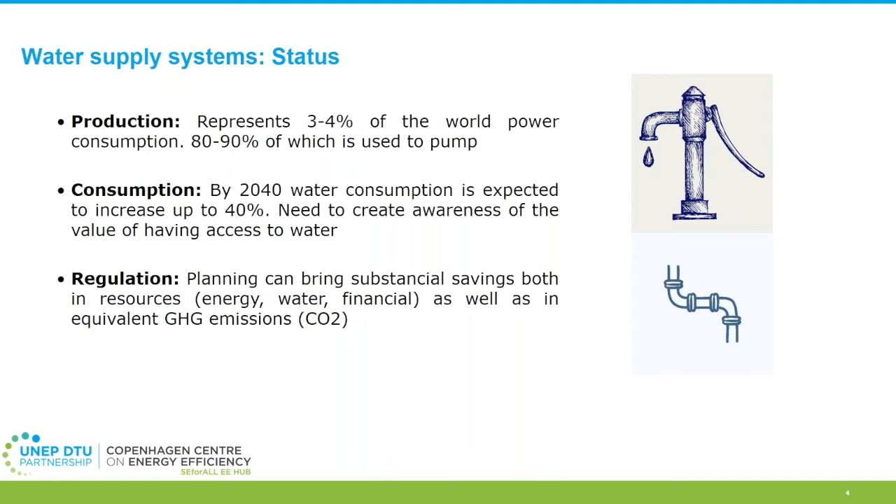Moving a bit into the specifics of the different stages and cycles of the water system. The water supply systems or distribution systems are the intermediate stage of the water cycle, and normally the one that consumes the most: on average 50 to 60% of the energy consumed in the whole cycle is used at the distribution system. Any inefficiency at this stage, of course, will have a larger impact in the overall cycle, as the other stages are tied to the consumer's demand, which is located in the supply stage.

But why is this so important? Basically, energy is the largest controllable expenditure in the water utilities. A high electricity demand can lead to unsustainable cost of operation, affecting directly either the public finance, budgets, or tariffs for final users. But best practices have demonstrated that specific individual energy efficiency actions and water efficiency actions can bring savings of up to 40% of energy and payback lower than 5 years.

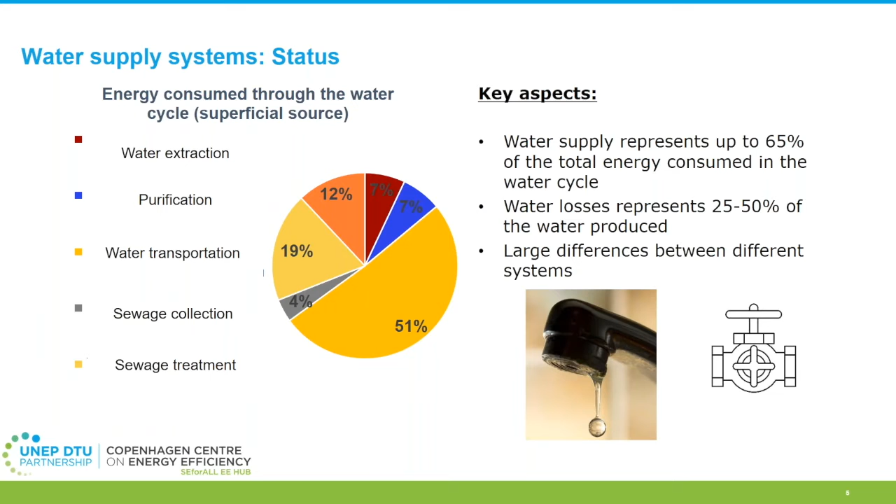So let's move into more specific energy efficiency opportunities and why actually we shouldn't look into individual opportunities, but more into a holistic approach on how we can bring together a joint solution for several aspects of the water supply systems.

So first of all, how can we measure the potential impact of specific energy efficiency actions? Indicators such as the energy index help us understand the existing relation between the production of water, or water pumped, and the energy consumed to pump this water, providing us with a baseline for comparison of more efficient solutions, or to understand if the existing system is already an efficient or a good one.

The potential benefits of specific energy efficiency actions can then be benchmarked against the current situation, analyzing both energy efficiency increase, reduction of energy consumption, and of course, what matters more, financial savings or equivalent greenhouse gas emissions or others. Only one thing about this indicator is that it needs to be normalized, which we will see later.

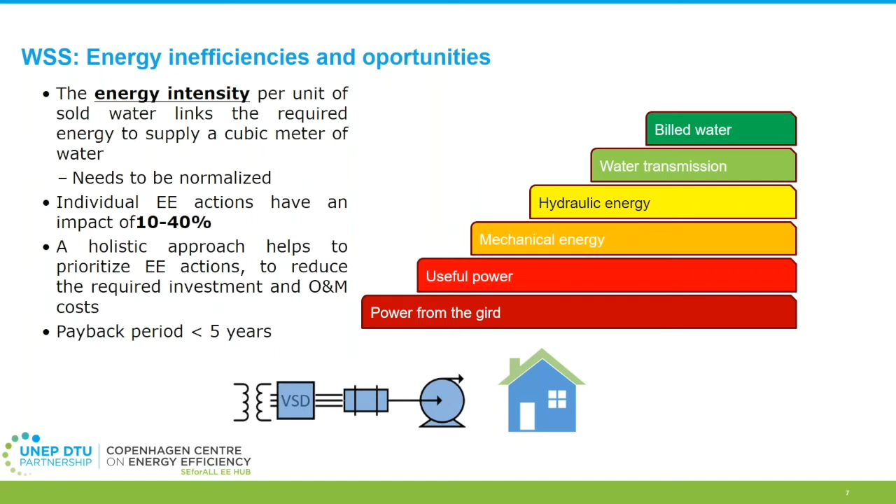Normally, the largest inefficiencies are easy to spot or are directly found in pumps, mainly working out of their design points or because of a lack of maintenance and being aged, so efficiency decreases quite a lot. But also we can find it in electric motors with the lack of variable speed drives. We can also find penalties from the power supplier due to low power factors, or lower efficiencies on transformers.

Normally, the issue is also that the fallacy that energy efficient components are too expensive is quite spread. But as a matter of fact, the purchasing price of any of these components doesn't represent more than 5 to 10% of the cost of the whole component during its operation over its lifetime, the rest being electricity prices and maintenance costs. So even though these more efficient components might cost up to 25 to 50% more as initial investment, the savings they would bring would impact much more the final finance of the system.

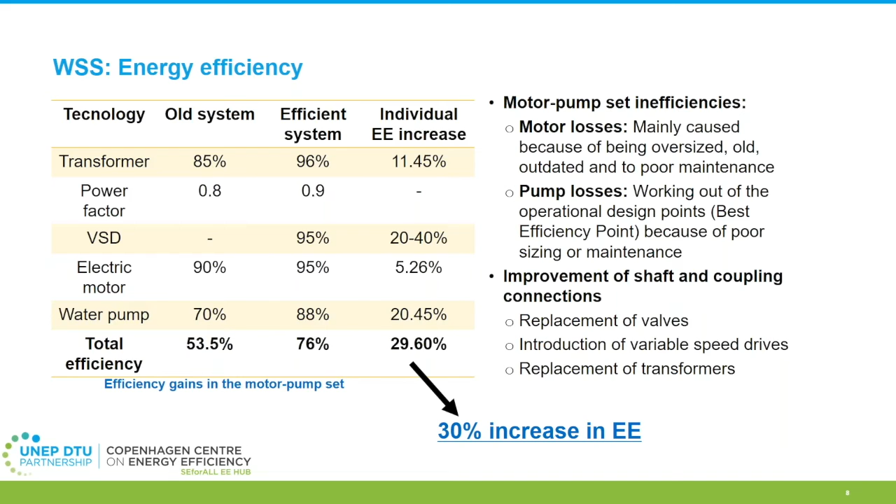As we were talking before, how can we compare existing situations with potential improvements through the use of energy indicators? These indicators are not just about a number, or the energy consumed divided by the water produced. We need to use some kind of scales that help us classify the obtained results as either good or bad. And then from that result, compare or benchmark with potential solutions or potential projects that we may have to set.

So basically, if national regulation is not yet available, we can use international best practices. For the normalized index, which basically brings the energy index to a common scale of pumping over 100 meters, we can either use the International Water Association indicator, Ph5, or the Portuguese standard, which follows the same as the IWA, from AA13AB. Both indicators are basically an energy index that joins efficiency for the motor and the pump, so the motor pump set. And these indicators can be used to classify these sets as a whole by either good, average, or bad performance, as in a traffic light.

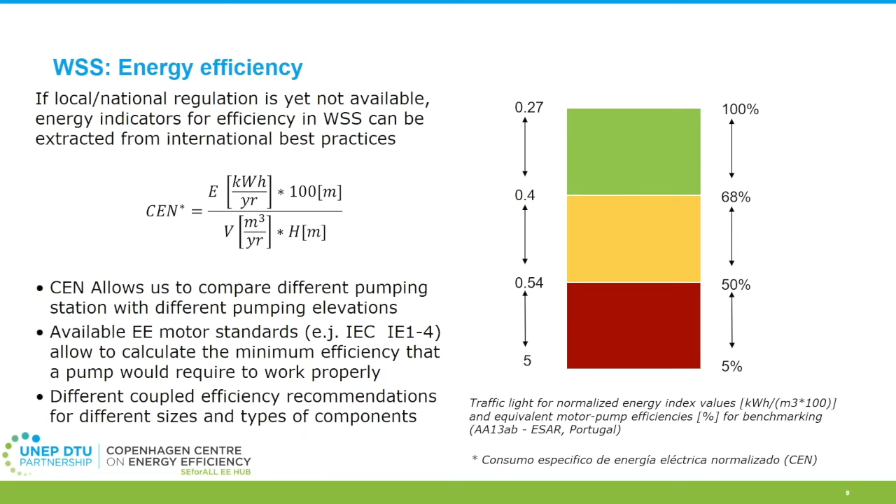Also, what about the total cost and investment return? As we were talking before, efficient or more efficient devices are more expensive, no? How can we define what's a good or a bad investment? The cost, of course, is 100% dependent on the local market, unless we aim to purchase something that is more efficient and is not available in the market. So we would have to go to a foreign country or some bilateral agreements that may exist.

A good way to select among different project options and to present to financial institutions or banks is to set up a limit payback period. For example, defining a limit of either 3 to 5 years to present to them, or 6 years in the case of transformers.

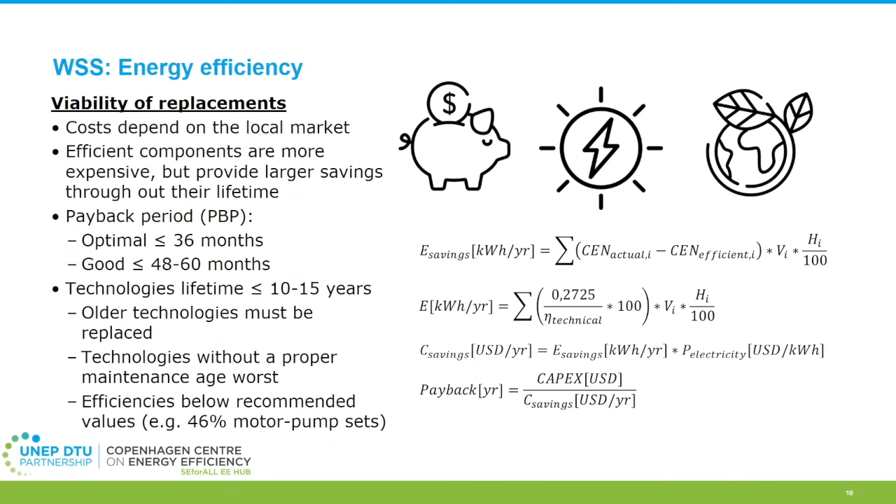But other factors to take into account are not only the payback period, but it could be the age of the components, being far beyond the limit of their lifetime, or also very low efficiencies that, even though the savings are lower, really constrain the grid, as could be a motor pump set efficiency lower than 46%.

A few examples now. As I was saying before, energy efficiency in water supply systems is not only about one simple component or even one utility at a time. It might happen that we identify several motor pump sets or several components throughout a region or a country that have the potential to be replaced. So we can make a joint effort to purchase more than one at a time and gain negotiating power.

One really good example is the energy efficiency increase in water supply systems in Guyana. The national water utility, together with the Inter-American Development Bank, studied the existing efficiency in several pumping stations throughout the country. And they identified where the energy efficiency opportunities were higher to alleviate both the utility's finances and the pressure on the national grid.

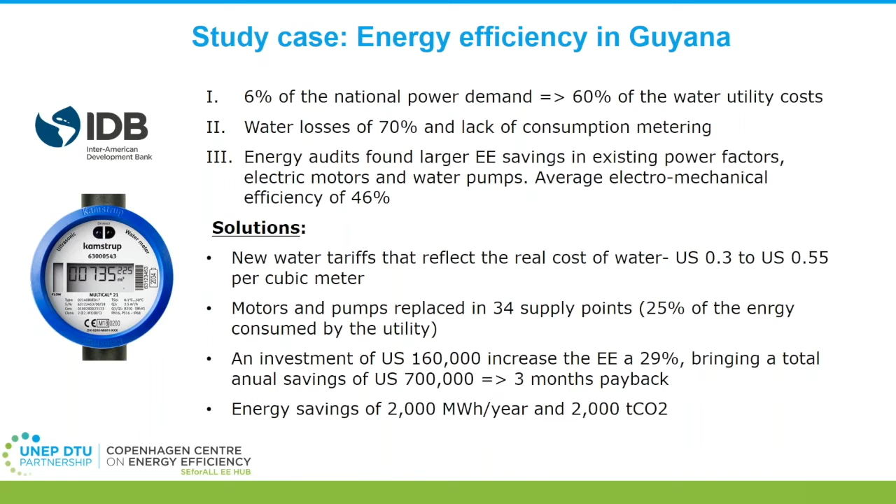In total, they replaced 34 motor pump sets, which were equivalent to 25% of the electricity consumed in the water sector in the country. The overall energy efficiency was increased by 29%, with annual savings of around $700,000 and really, really low payback periods of less than 3 months because of the existing inefficiencies.

But so far, we are talking about the water sector, and we are focusing on energy efficiency, which is the topic, no? But actually, water efficiency matters, and matters even more, because up to 2/3 of the potential savings that we can achieve in a water supply system come through water efficiency. So saving water also means saving energy, which is what we aim for here.

So first we need to understand a few terms. We call non-revenue water all the water that is produced but not billed, with the one exception of the authorized consumption not billed.

This is water provided to social groups in risk of exclusion, or to water public areas, or firefighters, among others. So we define this as an amount of water that is acknowledged by the utility as being consumed, but will never be charged for its consumption. So then we can really simplify non-revenue water to two different terms.

A first one, physical losses, are those related to leakages during the water transportation. The problem with the physical losses is that because the pipes are buried, normally we don't realize, or we cannot see that a pipe is broken unless it's really a burst that makes the water come out of the ground. So it's kind of an invisible loss that without better control systems, we will never find out.

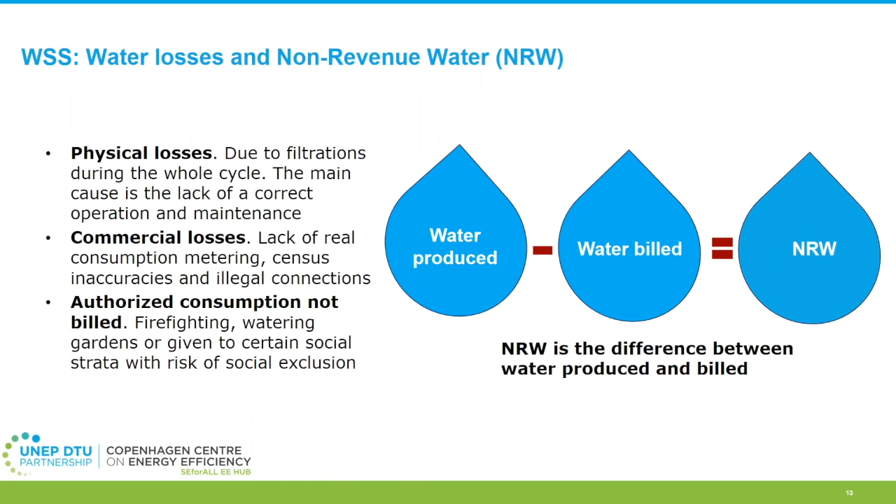So when you use metering, so the user pays for the water it consumes, it starts having a knowledge of the real value of the good of the water. And as a matter of fact, it's assumed that the introduction of metering systems or micro metering systems on final uses of water could bring up to a 25% water consumption reduction, meaning that 25% of energy would then be saved. In order to avoid both water scarcity and the negative impacts of climate change, a holistic approach that takes into account both water and energy is needed.

An approach is water demand management, which aims to conserve water by influencing demand. It involves the application of selective incentives to promote efficient and equitable use of water. It could be public campaigns to create awareness of the real cost of water, as we were saying before, new tariffs that reflect the real cost of water, and the introduction of metering, among others, as we were mentioning.

Water demand management is guided by economic efficiency, same as energy efficiency, so that we can achieve equity and access to it. This is perfectly suitable to include in water action plans with energy management programs that promote the automatization of the systems through SCADA systems, achieving a better control that helps us to reduce the physical water losses, and the implementation of preventive maintenance to avoid these physical leakages. And of course, the introduction of metering, so we can reduce the consumption of water per capita, we can avoid the theft of water, and we can avoid more leakages.

Another good example of a more water energy nexus approach is the SANASA study in Brazil. Basically, between the years 2000 and 2008, the city of Campinas developed a quite successful energy program that achieved an increase in tap water connections by 22% without additional energy requirements. This increase came especially from the connection of areas with risk of social exclusion, reaching 98% of connections in the city. In some of the utility pumping plants, up to 30% reduction in energy consumption and 20% of the capacity contracted to the power system were achieved only with the introduction of variable speed drives and less than 4 years of payback period.

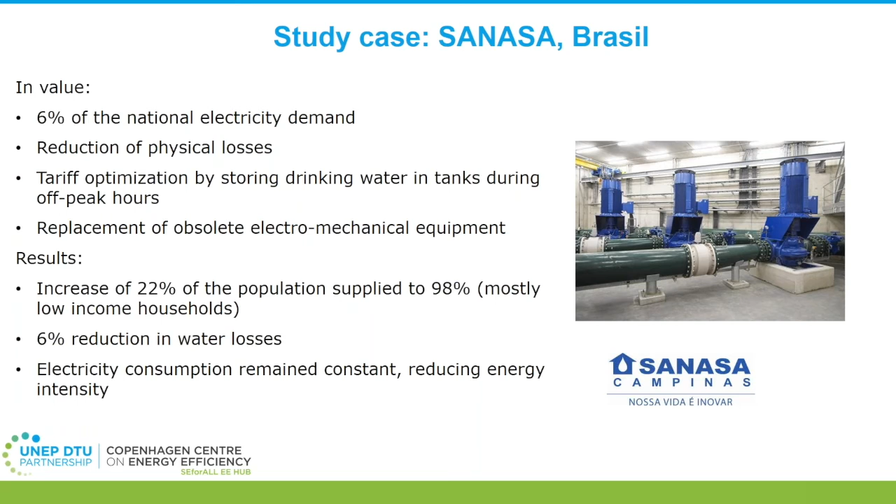To sum up a bit, on the potential for energy efficiency and water efficiency, the joint effort to improve both can deliver more energy savings due to the existing interlinkages between energy and water, bringing more financial savings, resilience against climate change due to water savings, and reduction of equivalent greenhouse gas emissions. And of course, the holistic approach also helps us with shorter payback periods and enables us to achieve solutions that otherwise individually would not be feasible.

Finally, a bit on how we can help in the identification of potential projects or energy efficiency and water efficiency opportunities. We have several tools, both for individual components and a holistic approach. In this case of energy and water, the tool we have takes into account both the energy components, being motors, pumps, transformers, and the water side of the system, being water pumped, water consumption, water bill. But we could also help in the study of the individual components. So individual transformer tools, individual motor tools, and individual motor pump set tools are available.

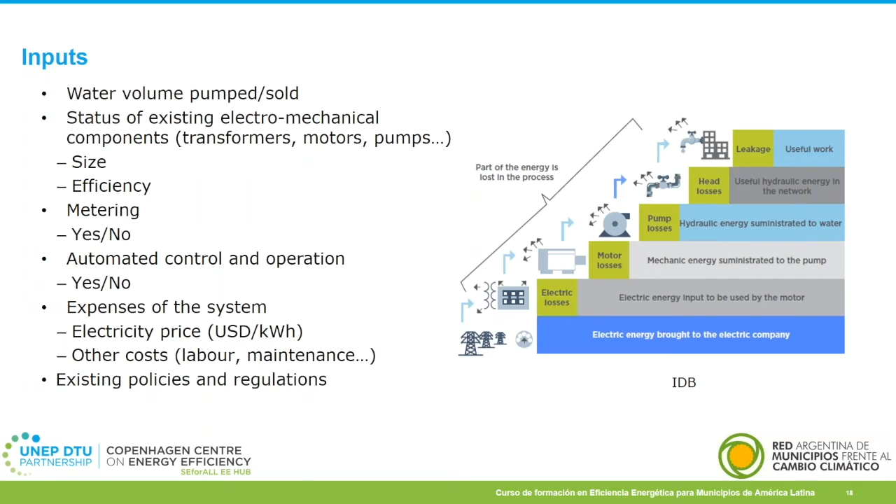Of course, these are rapid assessment level tools, and the inputs are quite simple, being the energy consumed, the electricity prices, and in the case of water, the total water pumped and charged. So we can do a balance on the opportunities of introducing different actions.

That's it for my side. So I think now is Xianli's time. Thank you for your time. Yeah, thanks a lot to Santi for a very interesting presentation.

I will continue what's left from Santi, talking about the challenges, options, and some international support on this topic. First, the global water system. We have some overview, the overall picture. What Santi mainly talked about is the urban water supply system. But water is also used for other purposes.

Globally, we can see over the past 100 years, the global water usage has increased by around 6 times and is continually growing about 1% per year due to population growth, economic development, and also lifestyle and urbanization. Those are different factors. In fact, urban water supply is only a small proportion of the total water usage by human societies.

If you think globally, around 70% of the water use is actually for agriculture, especially irrigation, and 15% for the energy sector, mainly thermal power plants, which need cooling, and also 5% for other industrial uses. And in the end, around 10% is for domestic use.

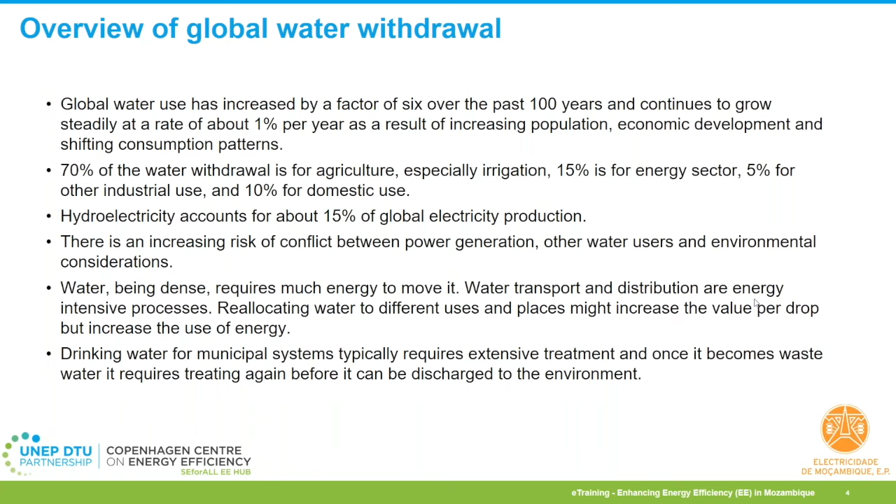And also drinking water typically needs a lot of treatment. And once you can move the water to the right place and get it clean, it can make it more valuable. Then in most cases, after its use, you need to treat it again to release it into the system.

The challenges: one is in water planning, because there are many different uses. So often, for the municipal water utility, how much water is available depends not only on the total water available, but also on how other users use water. And also because water is often shared regionally. It's not one city having exclusive access to a water source.

Often there are other sectors, not only municipal water suppliers, there are also other users who also need water, and other cities, other municipalities. So this kind of competition or sharing also makes planning difficult.

And often for energy and water, policy making and administration is done by different government authorities in isolation, such as the regulation of energy and water prices. That's often made by the national government, and the pollution treatment needed before wastewater is discharged by industries and households is often national policies and legislation.

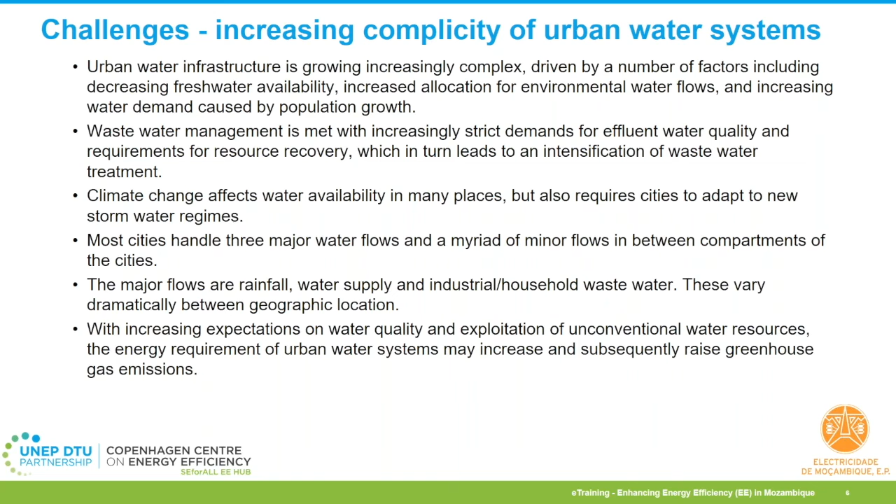And often in many places, actually, the rainfall and water supply are sufficient, but often the quality of the water supply creates challenges for the water management system.

As I said, the energy and water policies and project planning and investment are often made by different authorities, different players. Often they do not talk to each other. That's one barrier to tapping into the opportunities. Often the water authorities only focus on water, energy authorities only focus on energy.

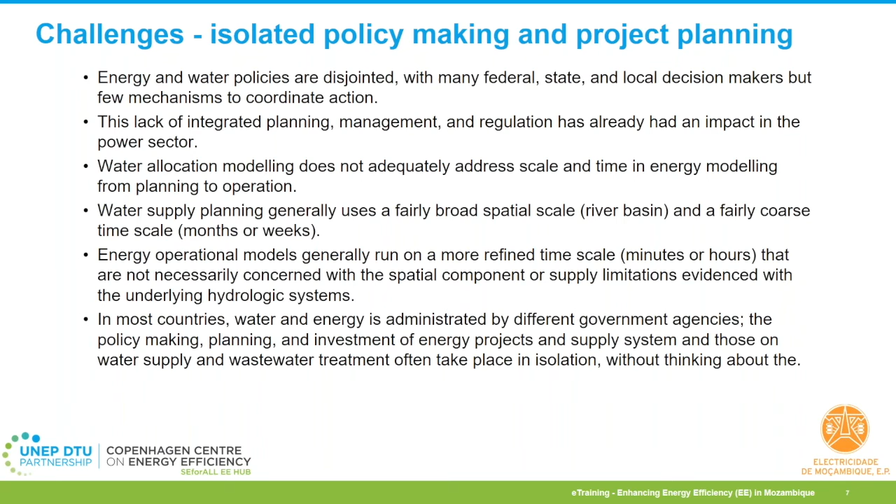So without this kind of coordination, the treatment people only think about treatment. So when they do not work or coordinate with each other, that makes the system expensive and difficult to tackle the opportunities. In face of the future water shortfall, cities or municipalities basically have three options.

First is to intensify the treatment, so increasing the production of a known resource to get more water out of a certain supply, or increasing water from other places. So that's also a solution. And in some dry places, you may have to dig deeper into the groundwater or even treat seawater to make it clean water. That's also very energy intensive, costs a lot of energy.

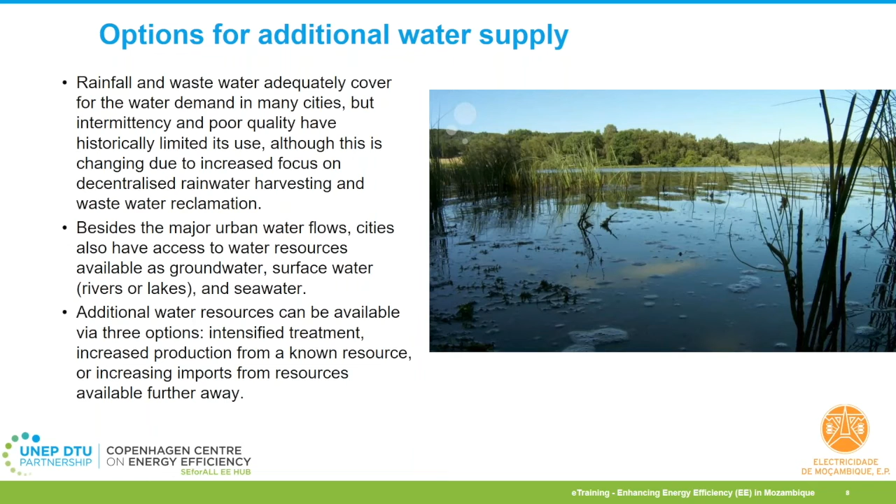And actually, there's an existing technology. Wastewater can be recycled and treated to clean water again. But that again needs a lot of energy in the process. So for the future, to tap this opportunity, one is really the nexus thinking, to integrate planning both in the policies and in the project design, instead of each player or each policymaker only thinking about themselves in isolation.

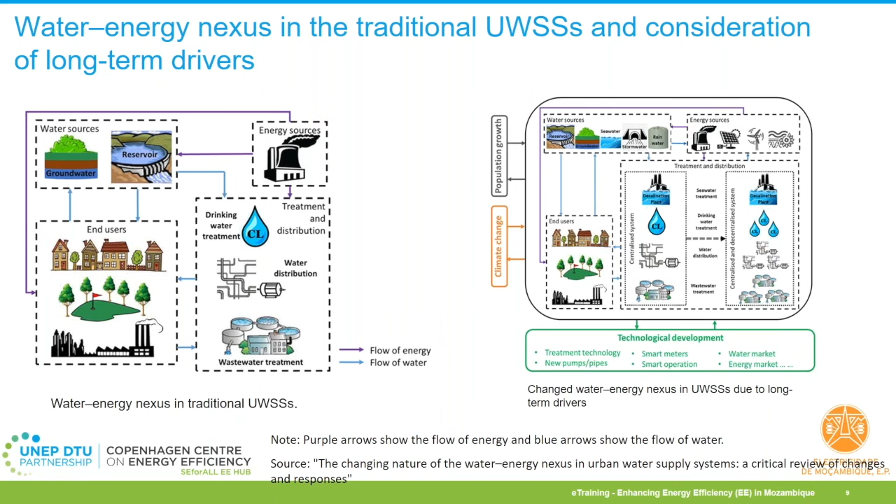It's more integrated to think about the whole process, how to save the energy, save the water along the process, and reduce their usage. So also integrate the most efficient technologies along the way, like treatment technology, smart meters, and the market. They use the price and the operation and new pipes, pumps, to make the process more efficient.

To do the water planning or projects to prepare for the future, the first step is you need to assess the local water availability: what's the surface water, how much groundwater you can have, and where additional water sources are, maybe a little further away, how much you get, and also desalination. This is an example of a city, how they do it.

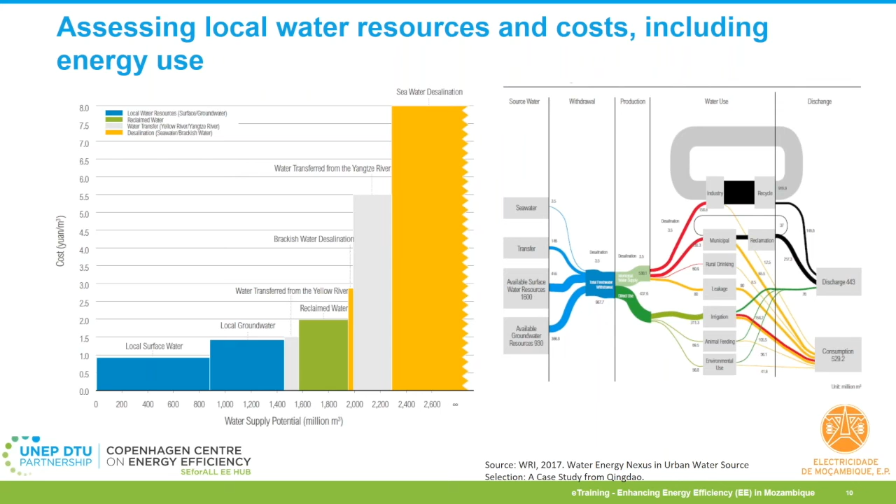Also they need to think what's the cost, where they get the water and where the users are, how to get there, where to do the treatment. So map the costs along the way, this water usage, who the users are, and what's after use, what's the wastewater, the quality, and how to treat that. So cities, when they do the planning, need to do this kind of mapping of the water usage and of the different water sources available to them.

And they also need to balance different factors. Consider water quality of each water source, and the water source reliability. Some water sources are different. For example, rainwater is sometimes a cheap source, but maybe not so reliable, and in certain seasons there's a shortage of water. Also impact on land use, especially when you build a reservoir or channels that need access to land, maybe even relocating some population. Also investment: how much will it cost for this source for each ton of clean water you want to get?

And also the energy consumption, how much energy we need, and the environmental impacts. As I mentioned before, there's also the issue of population resettlement in some countries, which can be very complicated, and also public acceptance. For example, treated or recycled water can be very clean, but no one wants to use it for household water. And also the issue of vulnerability of different water resources to climate change.